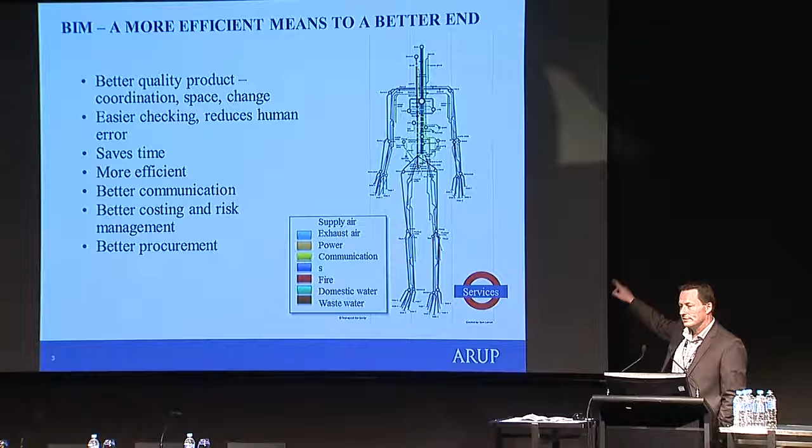It's quite good fun. What I'm going to cover briefly is our journey in Australia. It'll be a slightly Sydney-centric view because that's where I'm based. But we do have a regional strategy that we're leading across the ARUP offices here, and in fact we have our lead BIM modelers from Sydney, Melbourne and Brisbane up the back somewhere.

So we're very committed to BIM, very committed to BIM-MEPAUS and the advantages that will flow from that. I'll talk a little bit about promoting collaboration - we've heard a fair amount about collaboration already, that word has appeared a number of times on slides already. And then a little bit about this issue of model development: how far do we go? What does it actually look like when you get a model out of a consultant? What should it look like, and how are we going to standardise around that?

So starting with our BIM journey in building services - ARUP is a leading consultant in the use of BIM in structures, and of course structures is a lot more mature, and has been for a while. Being the building services leader in the practice, I didn't really like the idea that structures seemed to be ahead of us, so we were motivated to catch up with them, and that was one of the reasons, if I'm honest, that we were enthusiastic about it.

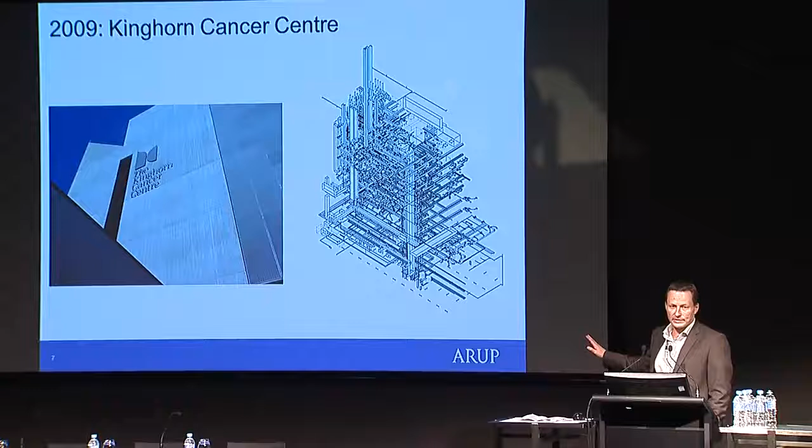But it was our first Revit project, and I actually think the job did benefit from it. We certainly benefited from the learning experience, and the outcome of that project is an absolutely fantastic, award-winning building, and we're extremely proud of it.

The next one, and I'm just picking the highlights - I mean, we do everything in Revit now, and since that bold or reckless decision I took, we have. But this building's actually just completing in Sydney in the next month or so.

8 Chifley, it's a commercial office building, Richard Rogers with Lippmann Architects, and ARUP did full multidisciplinary engineering, pretty much every single discipline, and that gave us the opportunity to work with our structural engineers, so you can see the level of modelling that went into that building was very impressive.

So that was, again, a big learning experience for us, the opportunity to work on a multidisciplinary basis. It's still super drafting, right? There's no 'I' in this, okay? It's just spatial coordination in 3D.

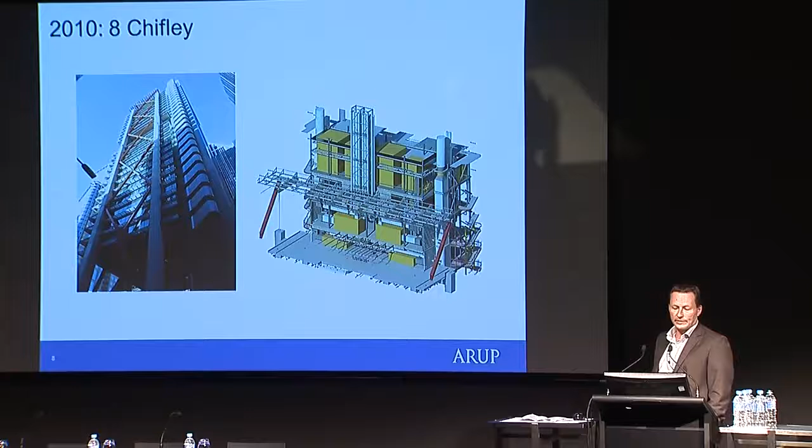This project, Westmead Millennium Institute, it's another health research laboratory project. This was a groundbreaking project for us. We'd taken on a young guy who was an intern, and he became aware of Revit and BIM, and he saw it as something he was really excited about. He's a really bright young guy.

So we had him in our office as an intern for about 6 months, and we just said to him, you don't have to work on projects, just work out for us how we're going to use Revit to do design better and more efficiently. And that's what he did.

So when this project came along, he gave us the opportunity to start to do some of this stuff. And what happened was that the enthusiasm and the gains that could be seen from the work he'd done, others started to pick up on. So we ended up with this kind of fantastic bottom-up approach to innovation.

So I was at the top sort of waving a flag, not having a clue even how to open a model, saying that's where we're going, guys. And all these youngsters were coming up with this fantastic innovation.

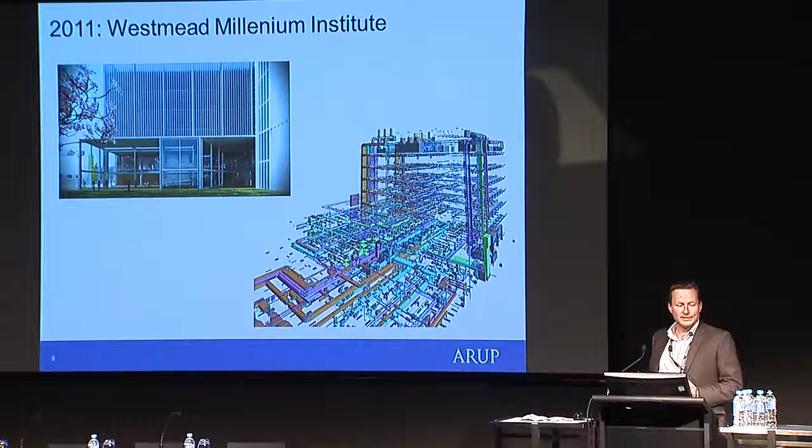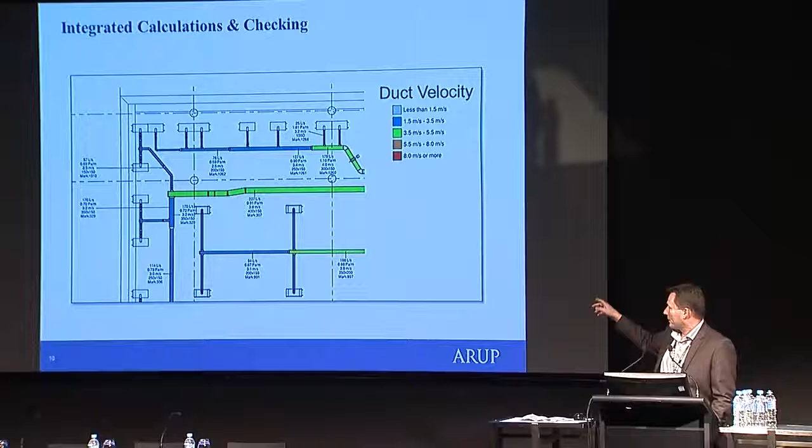So just a bunch of things I'm going to show you that we started to do through that. This is just a simple example - all the systems are modelled right the way through, so all of the airflow rates, the sizes, all that design information sits through the model and is calculated through the model.

So when we put a fan coil unit into a model, it's already preloaded with all the technical information, and then we can link that through, because we did this as a single multidisciplinary model. So the mechanical and electrical is all in the same model environment, so we're able to take the electrical information from the mechanical model and automatically load up the switchboard requirements by assigning them to distribution boards and so on.

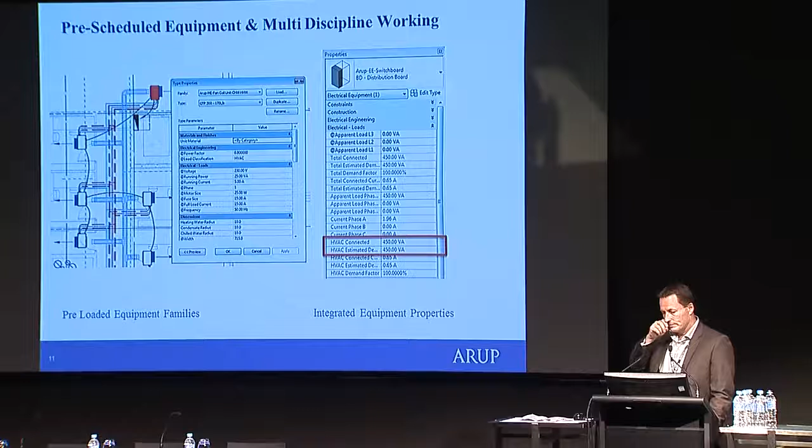This was just a little innovation the guys came up with. Every time we put a fan coil unit into the model in the mechanical parts of the model, it automatically creates this little dot in the electrical view of the model, and it gives you the requirements - so it's either essential or non-essential, it's a fan coil unit, 15 amp supply, and so on. Whenever that fan coil unit gets moved in the model, this little dot follows, and the electrical engineer knows.

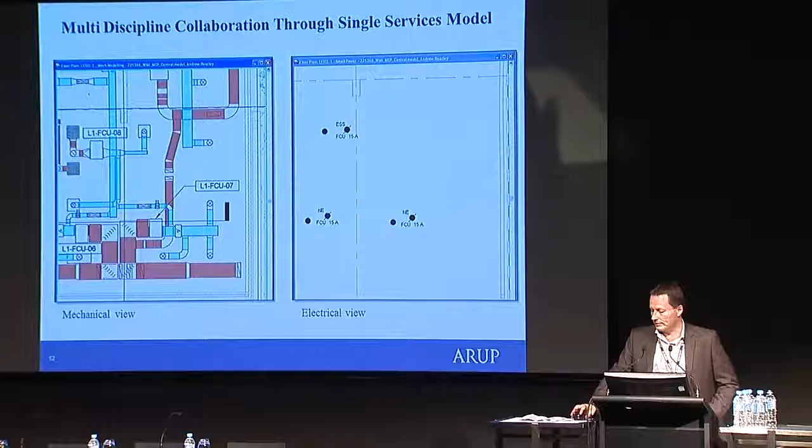So all these problems you had in the past of trying to coordinate, the electrical engineer knows what the mechanical engineer wants. That's all covered through this process, which increases efficiency and reduces errors.

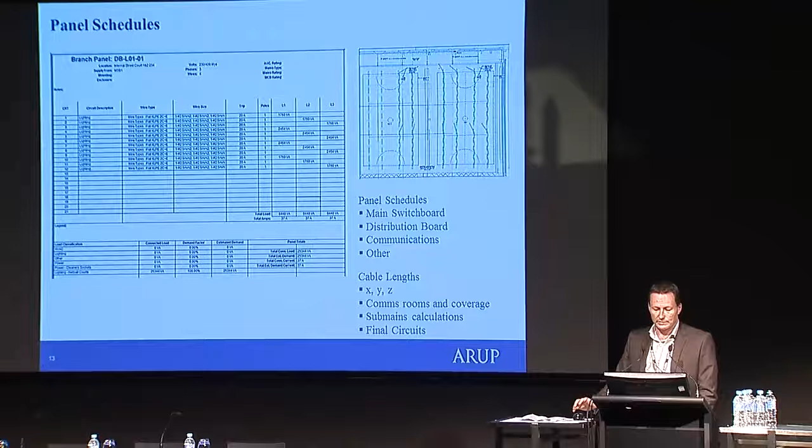So now we're creating panels, electrical distribution panels. We're checking cable lengths. For example, the old 90-metre rule on comms distances can automatically be checked through the model. All our equipment schedules now are created from the models.

And the other fundamental thing happening in the team as a result of taking this approach is that it's the engineers who are doing the modelling now.

And this is where the real efficiencies are from a design organisation. The old days where you had an engineer with a red pen who'd mark something up and give it to a drafter, and the drafter would draft it and give it back, and it would be wrong, and he'd mark it up again - that doesn't happen anymore.

The engineer goes straight in, creates the model, and at the same time populates it with the design information. Then at the press of a button, you generate your schedule. So that old thing you used to have to try and keep the information in the specification the same as the schedule, the same as the drawing - that's automatically covered because everything just sits in the model.

So it's kind of obvious when you think about it, but it does mean you've fundamentally got to change the process, the workflow process, and who does what in the office.

So I think at the beginning of last year we had 8 or 9 modellers in our team. We've got about 60 building services engineers in Sydney. For the last 3 months we've had 3. We had 2 others on loan working with Lend-Lease, but we essentially had a third of the number of modelers, and we were generating the same amount of work, because the modelling was being done by our graduates and young engineers.

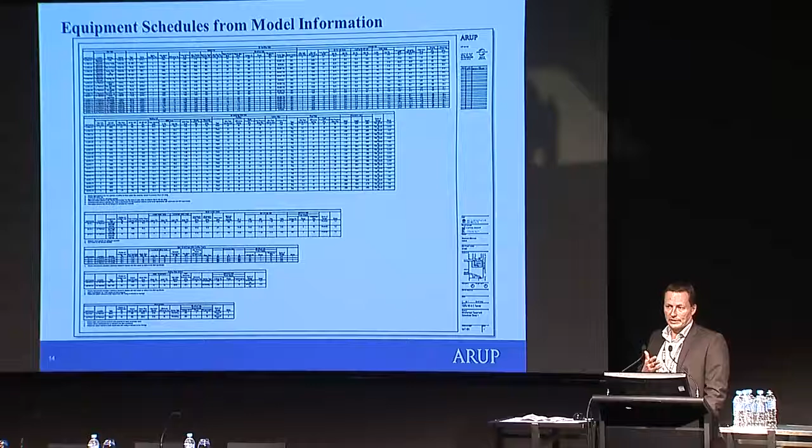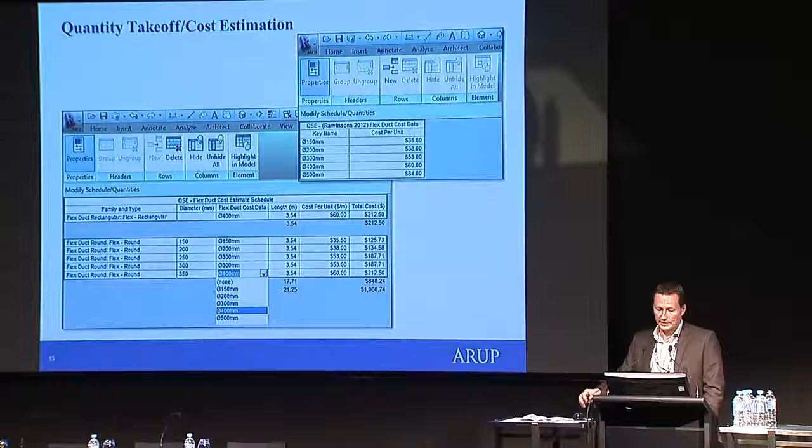Cost estimating: we now use these models to do our pre-tender estimates, and we found them to be far more accurate as a result of being able to pull this information out and get it costed through the model.

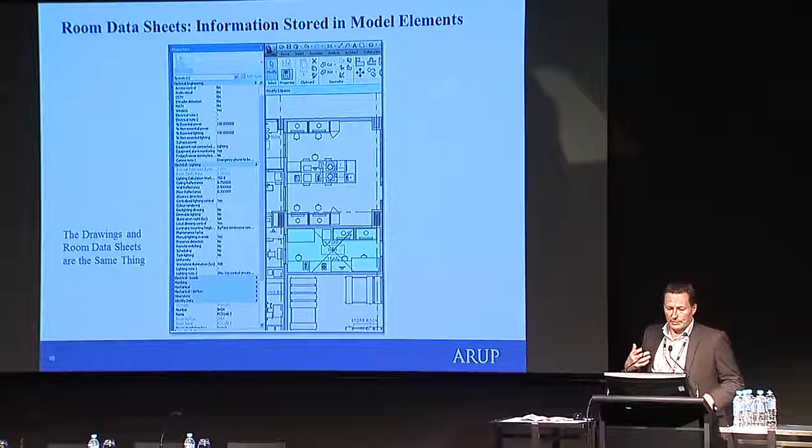Room data sheets was another innovation in the Westmead project. We worked with BVN architects on this, and we came up with a way of creating room data sheets that were both architectural and engineering. So every room data sheet is in fact a drawing that looks like this.

So again, that old process we used to have, which was frankly a nightmare of trying to keep room data sheets and drawings aligned - that problem immediately goes away because everything is coming from the model.

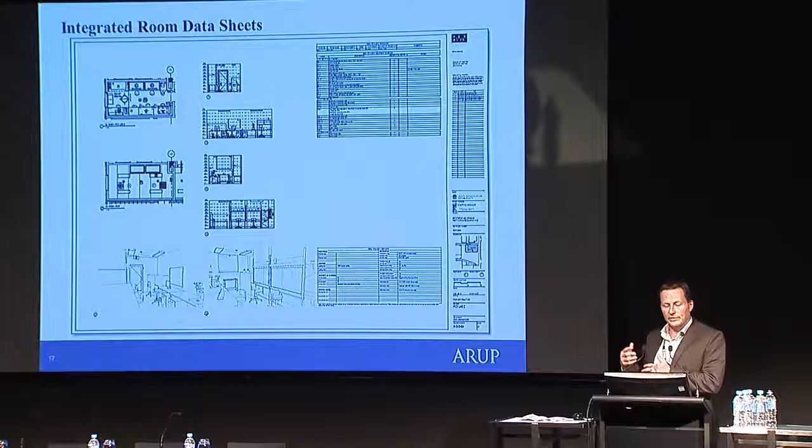And then, of course, the whole clash detection thing. Westmead was procured on a sort of design finalisation, which is basically a risk transfer - essentially saying to the contractor, well, we're not sure it's quite designed right, so you take the risk.

And that's a very transparent and open way of working. In fact, the tender procurement process went very smoothly. The project is now on site.

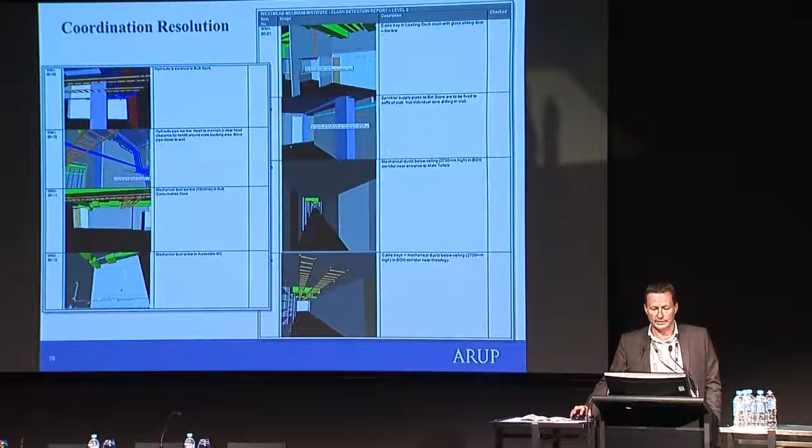So we got partway through the process, and they said, well, we want to come and have a page turn of the drawings, to see where we're up to. And the architect came along, the project manager and the client, and we said, well, I think probably the best way to start this is to just take you through our model. And they were blown away because they didn't have any concept that we were doing this. So that's the real value add for us. This is just what we do now. And the benefits flow through to the client.

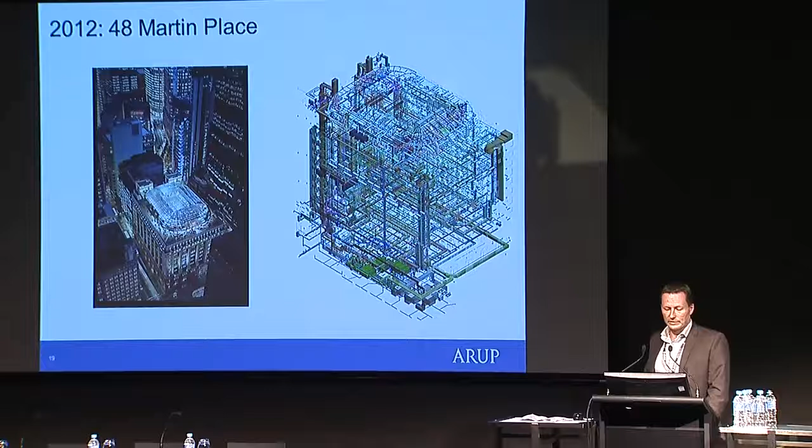So that's all about us in a way. It's all about our process as designers to be more efficient and to have more accurate information. What I'm really passionate about, and we've heard a lot about it here, is how do we get that information flowing through the supply chain to get real benefits for the industry, for our clients.

And it seems to me collaboration isn't about technology. I've sat here some of yesterday and all of today, and seen just a whole host of fantastic technology. Brilliant stuff. Very little of which I see yet actually happening on our projects. So it seems to me the technology is running miles ahead of our ability and the skills and knowledge that we've got as people and companies and organisations to actually use that technology. So for me, promoting collaboration is about how people behave, it's about people's skills, and it's about how we set up procurement processes to allow these benefits to flow, because the technology is a done deal.

And one of the things, of course, historically has happened is that we kind of set up a class system, I think, within the industry. And we need to break that all down. We need to understand we're all in this together, and if we're going to achieve these better outcomes for us all, then we're all on the same level. And it just reminded me of this video, which you may have seen before.

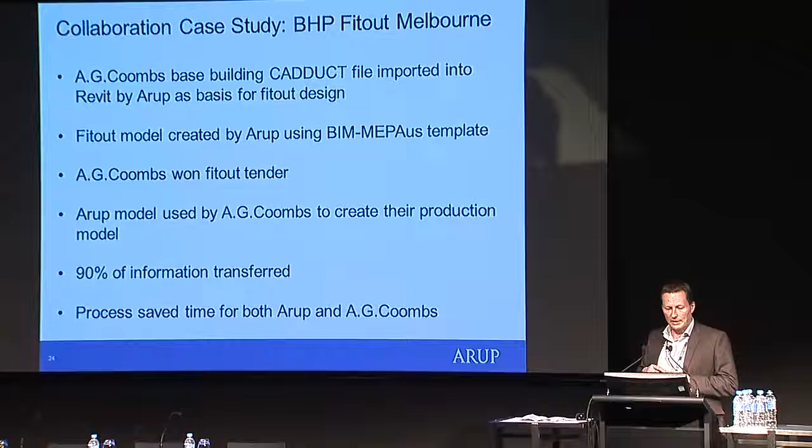Finally, I wanted to touch on this question of who does what. I think the previous speaker made reference to the fact that there does seem to be some misunderstanding out there as to what level of detail can be expected of a consultant, and that's a high risk scenario for us - we need to educate others, clients, project managers, and so on.

So let me cover this first - there's a little diagram I put together for a global conference in San Francisco within ARUP, looking at how we take BIM MEP forward. Just to explain how I saw things moving in terms of Australia, for the guys from the rest of the world, I put this little diagram together. It's kind of obvious and self-explanatory.

So looking at the different stages of a project - what happens with the model? This idea that we need to get to a single model moving through. ARUP would own the model at concept and scheme design stage, with contractor input to the model around design development and into contract documentation stage. This is where procurement is absolutely key, because if there's no mechanism for the subcontractor to be at the table at that point, then that isn't going to happen. So we need to come up with ways of early contractor involvement or whatever it might be, so the contractor can own the same model, and ultimately the model gets populated with product data and commissioning data and so on.

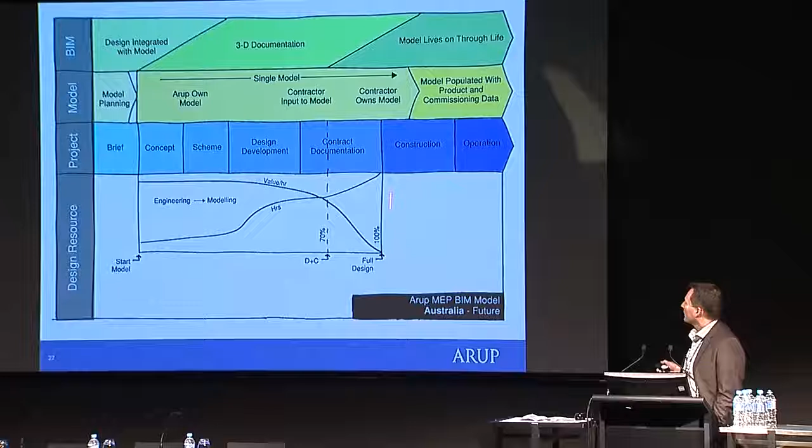In some of the more complex projects, typically like laboratories and data centres, we are asked to go to full design, and even then, as I say, the Westmead was a kind of 90%, almost full design. Then the subcontractors come on in a more traditional process. But I really think this whole issue of how far the consultant goes, when the contractor gets involved, and how we make that work is key to this process, and it's driven by us having a mutual understanding.

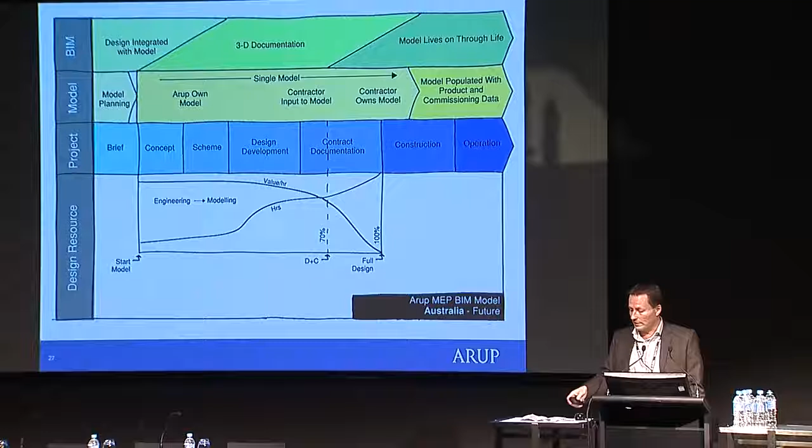of what we're trying to achieve, and a procurement process that actually allows that to flow. So we do now at least have some definitions emerging, and I know AMCA put out a paper recently which Duncan Sharp from my team was heavily involved in helping to write, which was looking at different LODs and what they mean in terms of how far you go.

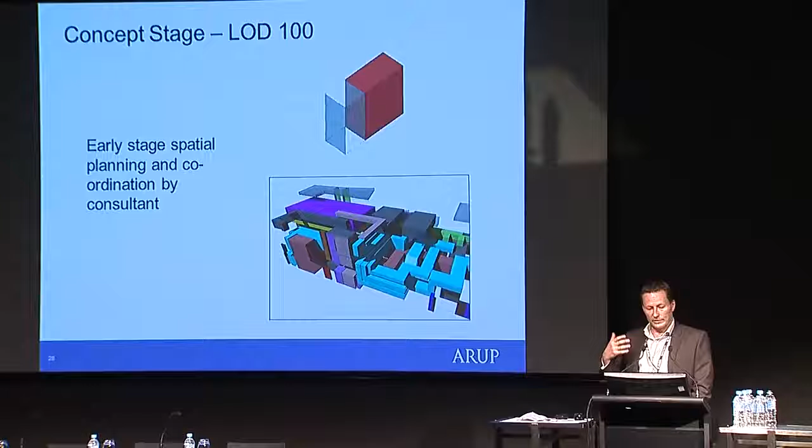So LOD 100, conceptual space planning sort of stuff, clearly the consultant would do that. LOD 200, in my view, is a little bit less than a consultant would traditionally have gone to in terms of design for a fully documented design in the past. But we can stop at that sort of 70-80% stage that I talked about, which I think is around LOD 200. So it's suitable for D&C procurement, and indeed is sufficiently developed to allow us to do all those design processes that I showed you earlier and get the benefit from that.

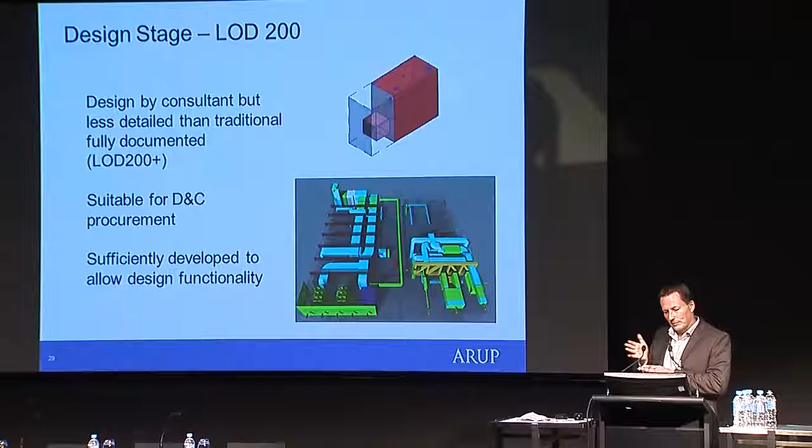LOD 300, though, is in my view beyond what a consultant would normally do. So we've got this kind of in-between thing now, where we're 200 plus, or do we call it 250, or what? I think we need to understand what that actually looks like in terms of a complete consultant design. So 300 is more detailed than I believe a consultant would traditionally have done, and if a client actually asks for that, they can expect, or ought to be expecting, a higher fee.

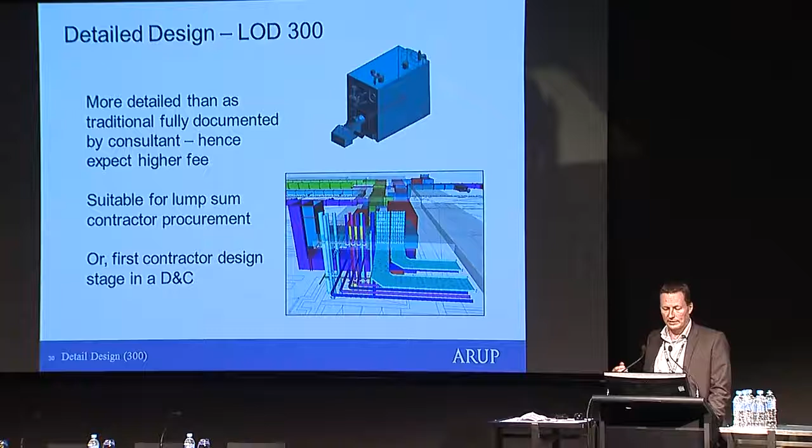Certainly suitable for lump sum contract procurement if a consultant does go that far, or this is the stage where a contractor, if they pick up a D&C, moves the design forward - this would be the first stage. Of course, we know that 400 is for construction, so subcontractor workshop drawings and the like, and then the whole FM thing further down the track.

Heard a fair amount about that idea of how we get through to the FM stage and asset management and so on. I have to say I'm still seeing very, very few clients who have yet got their heads around what that actually means or how they do it. And in fact, some of them are openly saying they don't want it because they don't know what to do with it. But I'm sure it will come.

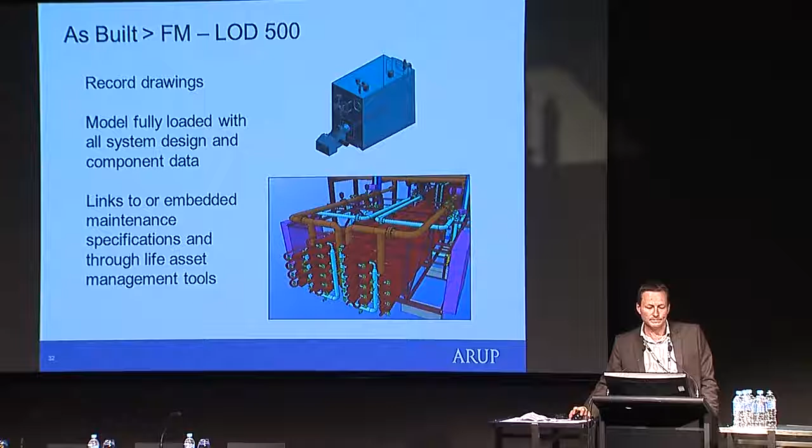So in summary, in my view, BIM in terms of MEP design is a done deal. We can do all that stuff, we can do it efficiently. We simply need to upskill our engineers to be able to work in that environment. For the full benefits of BIM to be realised, we need a more collaborative industry, driven by more intelligent procurement processes.

And as I say, for me, it's about people and procurement. The technology's there. And there does appear to be this emerging standard around LOD, BIM-MEPAUS, which is helping to drive convergence and ultimately, I think, benefits for all. So we're certainly totally behind that. We want to be seen to be at the forefront. We want contractors and subcontractors out in the marketplace saying that if they get an ARUP model, it's going to be more efficient, lower tender costs and so on. Clearly, that's of value for us as well as for our clients.

And that is about it.